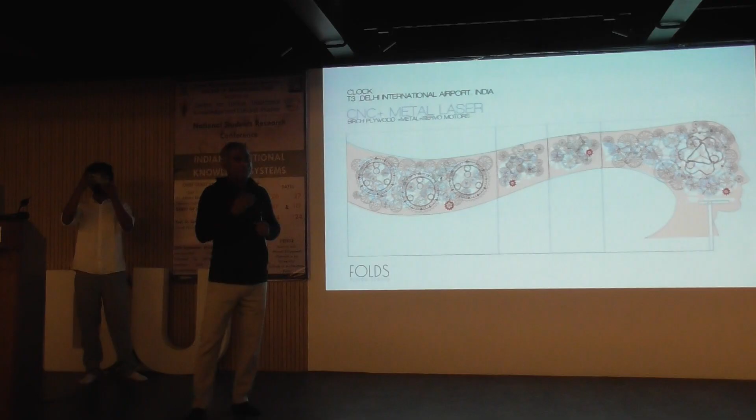So this is a project that we did long back in 2017. This project came to us as a small installation that we were supposed to do. We were in practice for almost 10 years by that time. So this came to us as an installation. We were supposed to design an installation which had gears, for Make in India.

This came with a certain cost, and that cost was 4 lakh rupees. We had to do the installation in 4 lakh rupees. That's the thing that came to us at the initial stage.

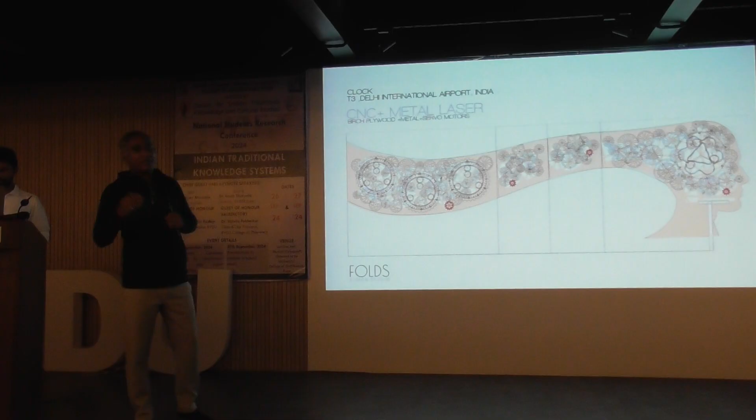And for the first time, a project came to us where we were trying to do an installation in an airport. This was the T3 International Lounge that we were doing at Delhi. So this came to us.

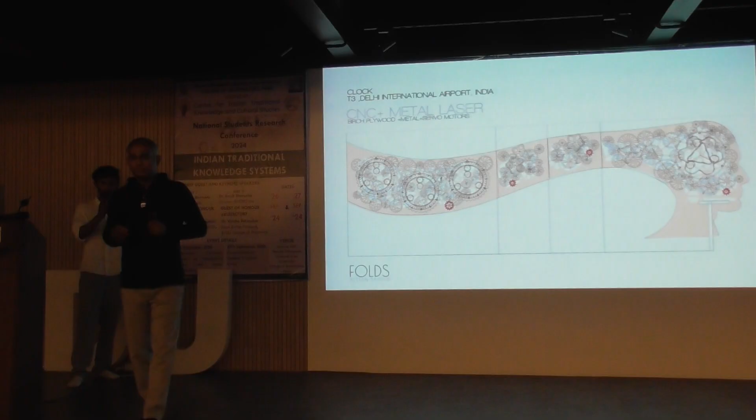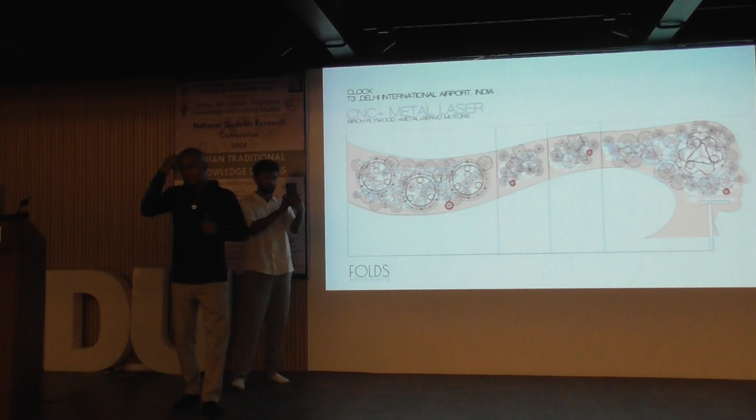Now the challenge is, since it's an airport, we thought we have to go beyond now, because for the first time we have to put everything into it. We couldn't leave this place as it was. So, 4 lakh rupees just for gears. But we thought, just gears - everyone does that. As an architect, what can I give other than gears? So we thought, let's design something which is out of the world, something an architect will never do. So we thought we'll design a clock.

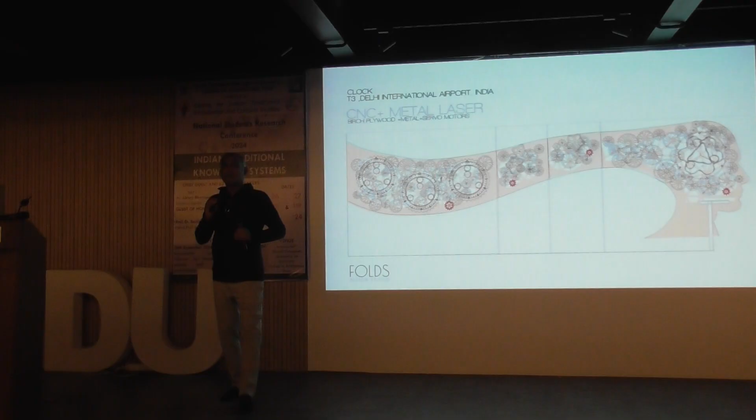And mind you, when I'm saying clock, it has to give time, right? It has to show time. Very important. And the best joke is, this is not a 2 feet, 3 feet thing, but it's a 40 feet long wall that we got, and it's a 40 feet long clock that we thought we would design.

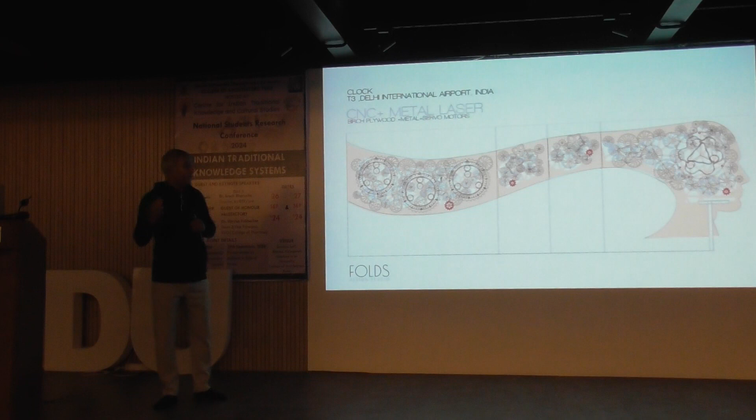Now that's a very complicated thing, with gears revolving into one another, and at the end of the day they're supposed to show time.

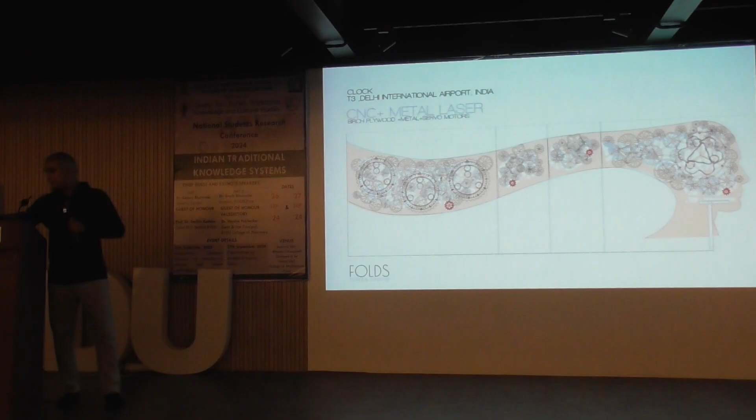So basically we thought we'll design a concept of a human being, a human brain, because the human brain always thinks something or the other, and everything is with respect to time. Whatever he is thinking, it is with respect to that time, is what we thought, and we designed a human head, and from there the gears continue, and then it ends up into the time. That's what we thought about.

But as we worked on it, we realized at the mid stage that this clock we were designing, the 40 feet long panel that we had, was not straight.

It's got an angle between. In the center we have got a big angle which is turning its surface at 45 degrees and going back again, and then the surface. Now that's the trickiest thing. So having gears in straight was easy. The clock was easy as long as our research was perfect, when it was a flat wall. The moment it changed its gear, its direction, that became difficult because we had to interconnect them at a degree. That was the difficult part. Yet we did it.

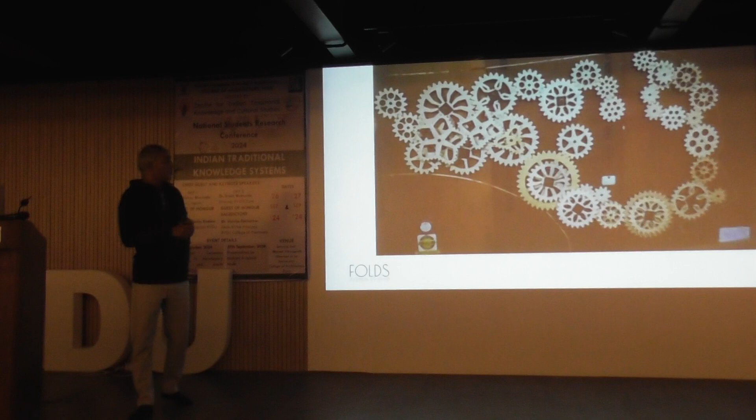So this was the experimental thing at the initial stage. On the right, it's working with servo motors. On the left, we were just trying to understand whether they were working properly or not. So this was the experiment that we did at our factory.

So that's the installation that went on the site. This was taken in 2017, that video. It's in an international airport. So that's how all the gears are interconnected. There are only 3 servo motors that we calculated to a precision.

In a 24 hour span, the clock leads, it gives an error of 2 minutes. So every 24th hour, we have trained a person, he has to go back and reset it. He resets it and the clock is ticking again.

Fortunately, 6 months back, I had a friend who was going abroad, and he had a flight from Delhi airport, T3, an international lounge. It usually has sound, it's an international lounge. He went there, he clicked this video for me, and then he said, 'Sir, the clock is running, it's ticking.'

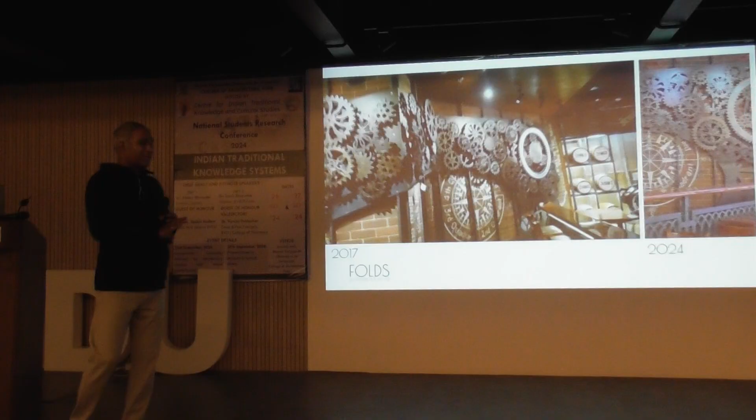So it's almost 8 years now. A clock like this, that huge, having almost 200 gears, designed by an architect, it's still working and showing time. So we were so happy that we built such a product which is still running today.

Many a times they don't work, right? Some errors will be there, some problem will be there, won't they? 8 years our machine has run, not even one single call till date. Okay, 8 years, not even one single call. Fortunate enough that our clock got built, and it is there, still existing.

So today when we hear that buildings are finishing in 40 years, my clock has run for just 8 years. Just thinking, good, at least something has been built. So anyways, then the clock as an installation, as an architect, I could do it.

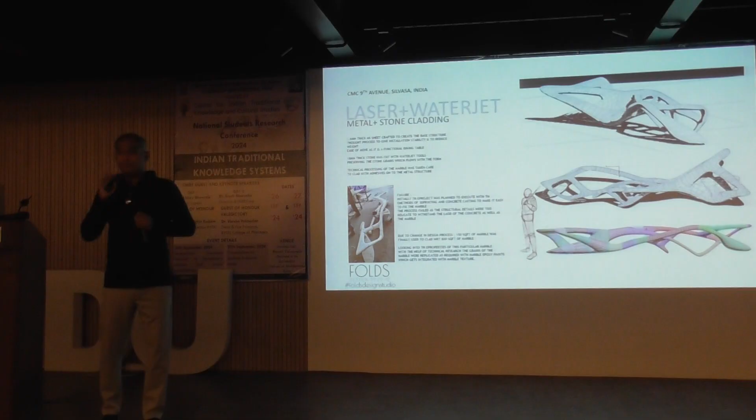Then this is like a bench, a dining table that we did for a classic marble company. This was the first time that we got our 3D printers in place. With 3D printers live, we were experimenting as architects, but we miserably failed. As architects, we are also designing, we are also producing. We miserably failed understanding the technology of 3D printing. But today we are masters at that. At that given period of time, we failed, but good we failed, because I think that was the wrong thing to use in this case.

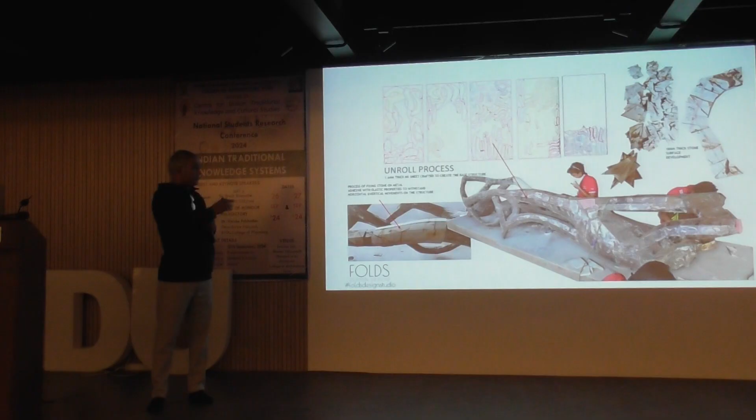Then what we did is we built structurally, we built a metal detail inside, because doing it in solid stone was the most dangerous thing, because if you have to ship it from one place to the other or move it even in your own area, a solid marble engraved piece may break, even a minor accident may break it. So we thought we will use a metal structure inside on a tessellated format. We designed this using programming languages, and then we got this metal structure intact.

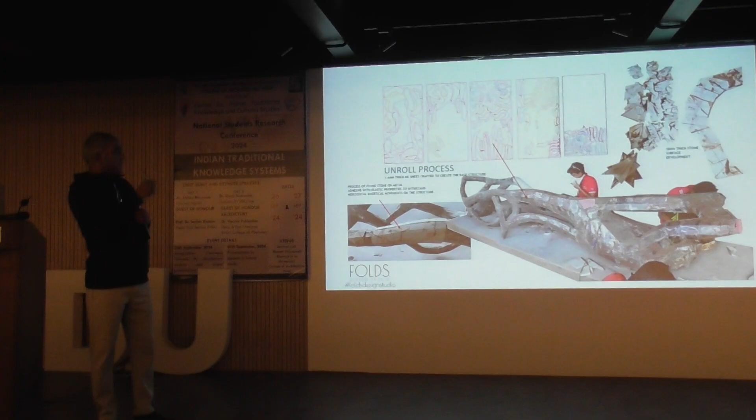Then we used only 4.5 sheets of marble for this 16 feet long table. Each and every piece was cut using a water jet machine, so that all the grains match with each other to get that kind of design detail. End of the day, you can see that all the grains are matching. That is very important, it's not that you are just making a product and delivering it to your client. Your details have to be matched, every piece, every grain has to match to each other. So that's what we could do end of the day.

You can see the flooring and the table that has been designed. They look as if it is jetting out from the floor. The same marble was used to execute this product. So we need to understand how to deal with materials. In this case, there were two different materials such as metal and stone.

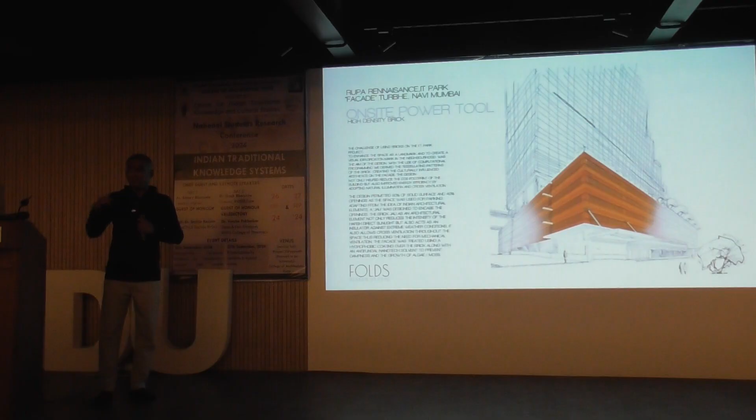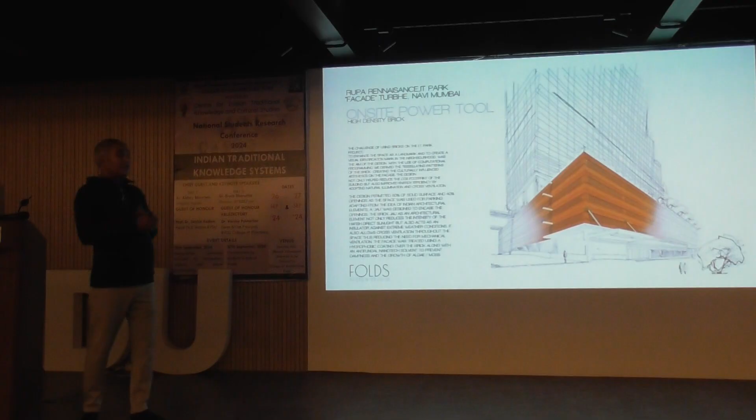When I'm saying steel structure, there's a lot of vibration that will go into the building. And then it is a parking bay - all the time there is movement inside the space. And since it is cars and vehicles that we're looking at, the temperature inside the building will also increase. So we thought, let's come out with some sustainable material, such as brick, which will also reduce the temperature.

So hence we selected this material as the base material. We got these high density blocks from Mysore, and then we cut those blocks. Usually brick comes with a certain kind of size, but we cut each block into 5 multiple pieces so that we can reduce the cost.

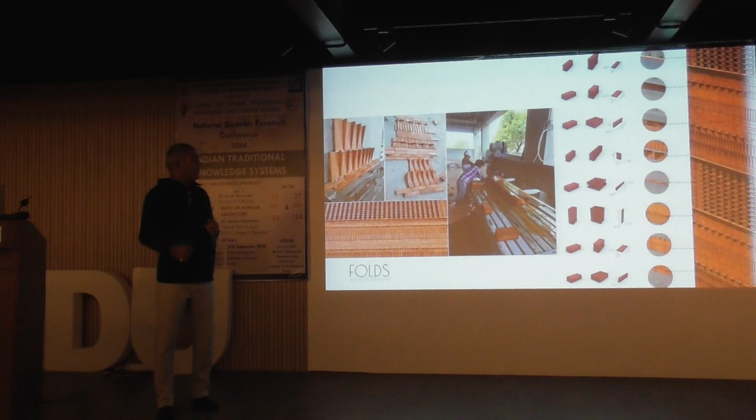Then how do we cut it? For 1 lakh square feet, that means 1 lakh bricks, cutting 5 pieces each, what will the time schedule be? We had to build a machine on site like this. I built a machine where I could cut 20 bricks in one line, so within 1.5 to 2 minutes I could cut 20 pieces. That's how we built a machine to get that kind of outcome for the bricks.

Bricks are being made now, but with the bricks, what is the design that we can do? So we created multiple patterns on site. This has nothing to do with computational programming, it's just on site laying and playing around with bricks. That's what we did, and finally we came to a solution.

We decided we would have this kind of facade, this kind of design detail that I'm trying to show you. We thought we'd have this kind of facade on the surface of the building, so there are different types based on how the brick was cladded onto the facade.

We were given a concrete surface, a lightweight concrete facade for the building. We thought we would paste these bricks onto this facade. But how do we paste it? What is the material, what is the adhesive that is available?

Part 1, part 2 - bricks are very attractive to algae, right? Within a few days algae will form, that's a problem. That's the reason why most people don't use it. So what do we do about this? We had to find new resources.

We got something called a nano coating. What we had to do is, before pasting these blocks onto the facade, we had to dip each and every brick into this nano coating material, sealing all 6 sides of the brick before pasting onto the wall. This way, during monsoon, the rain doesn't percolate into the brick, water doesn't retain there, and no algae grows on it. So this is the protection we had to do.

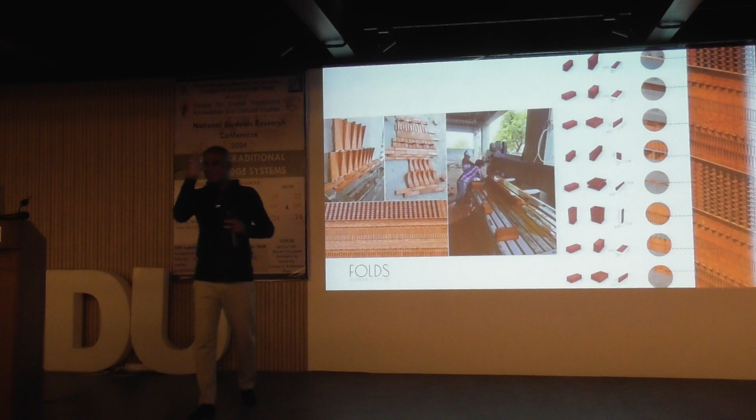Part 2, you're also seeing brick where these vertical pieces get cladded onto the surface like this - vertical, not like the other pattern. The surface area of the brick in this case is more, but in this case it's just 12mm thin. So getting this 12mm thin piece pasted onto the wall of a steel building which has vibrations - what adhesive do you need to use for that?

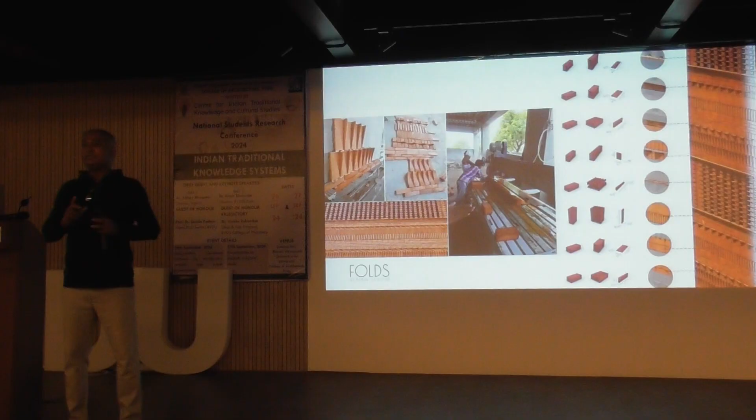That is again important, so we had to practice all this at the initial stage to derive a good solution and get the building executed. We had all those design details, multiple challenges, before we could execute that building. That was the surface that was given to us.

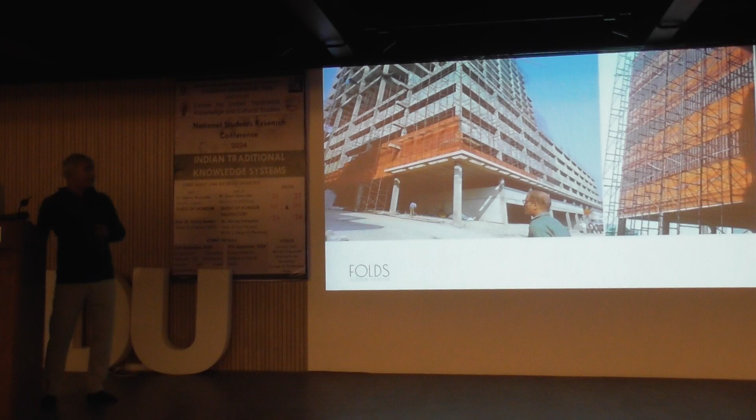We had 17 different people. We taught them how to do it on the floor first so that we get precision - 5 floors worth of height, having these bricks laid together in one line. They are laid in an absolutely straight line, and to achieve that is not easy at all. It's got multiple layers.

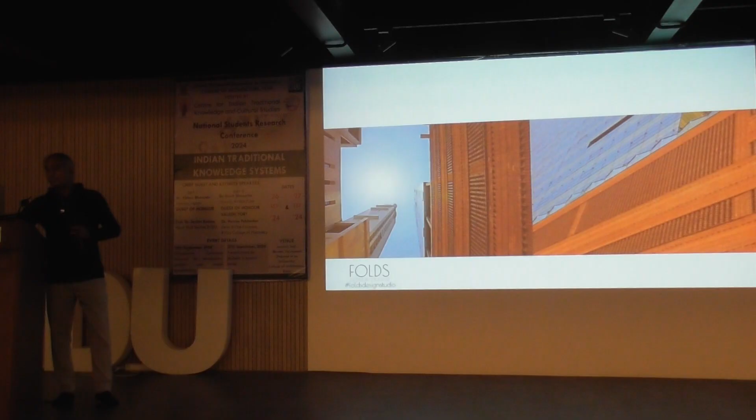There is also ventilation in between. That's how the building looks. You can see the precision. The building was done 4 years back and it still looks like that - there is no growth of algae on it at all.

The best part is this nano coating material protects your brick for a minimum of 5 years and maximum of 10 years. Before 10 years, you just go back once, spray it again, and nothing will happen within those 10 years. So that's how these materials work.

Look at the detail, look at the shadows falling on us. Luckily, this building's surface came to us exactly placed in an east-west direction, so the play of light was very beautiful in this case. Those details were precise.

Internally the jalis were designed so that we could get cross ventilation and reduce the temperature inside. We built these jalis, but they may look very simple. Do you know these jalis are vertical, half-cut bricks, laid on just a 12 mm slice of a brick? That's the stability of the product, and this is something we need to understand.

It's not easy. Small bricks laid one above the other as a continuous slab, again one above the other. Now the bonding agent has to be perfect. You can see the bonding agent there. It has to be just 4 to 5 mm or 6 mm maximum. Even if you increase from 6 to 7 mm, the bonding agent will not bind these two materials. That's how important it is.

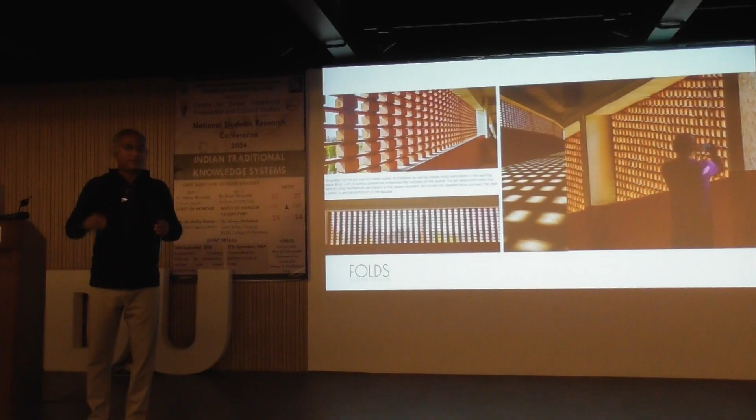Then we had to call the vendor, and the vendor was ready to give it in writing: 10 years, nothing is going to happen. Before 10 years we will come back, check it, do the grouting and leave. Next 10 years you don't have to do anything. So that's the kind of adhesive they provided to us.

Now this had fallen. Then we realized the worker had used the bonding agent material up to 16 mm, because of which it did not bind to the base material. So those are the errors. We realized this won't work. 6 mm means 6 mm only. You can't just increase it because we have material lying around, let's stick it on.

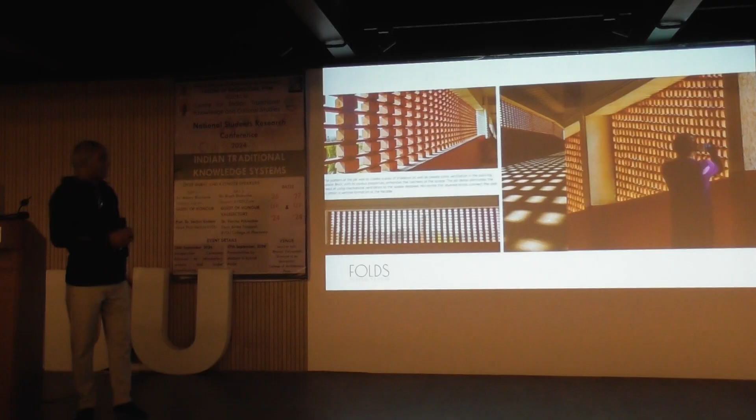So that was all about the facade. Then the interiors we did inside was almost a 20,000 square feet lobby that we got. We didn't want to design it the way lobbies are typically designed, using Italian marble, ceilings and wall coverings, everything. We wanted to go in a different way.

While coming back from Goa, we saw this kind of tree lying down on one side of the road. We realized, why can't we have that kind of design detail? Let's copy that as an art installation inside the structure we were designing. Quickly when I came back, I drew that sketch, a 120-meter long sculpture, weighing almost 80 tons, supposed to be suspended from the ceiling. That was the design we thought we'd go for.

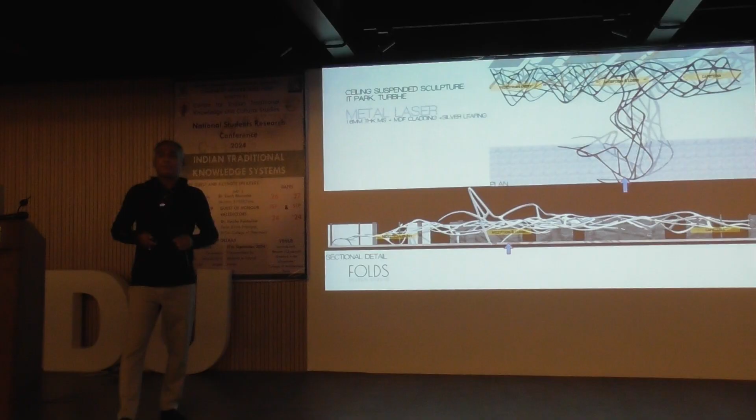After the sketch was complete, we made a 3D rendered model using software. But after making the model in software, we can't end there since we have to execute. We had to actually 3D print the model and understand how it would look when placed inside the building, with human scale, just to understand whether it would overpower the space. So finally we did that.

80 tons of load was supposed to be suspended from the ceiling, a 120-meter long sculpture. If we have to suspend an 80 ton load from the ceiling, what do we need? There might be huge cables, metal structures, a lot of things, but here there's nothing like that.

We plotted 200 separate points on the whole installation, which is 120 meters long. Each point can take a load of 600 kgs. Each point, using a 6 mm thin cable, is what we have used. This 6 mm thin cable has been used to suspend the whole ceiling at 200 different points so that we can distribute that load across 200 different areas. And the whole thing got suspended from the top.

We could do this because we had to find a vendor who could help us with this material, these SS cables, which are only 6 mm in diameter, so that the whole sculpture looks seamless.

It looks as if it is floating in air. That was the whole idea. But we can't do that, right? It's not magic, we have to suspend it. This is the cable that we could get it from there - the Hilti cable that we used. The whole product was unrolled.

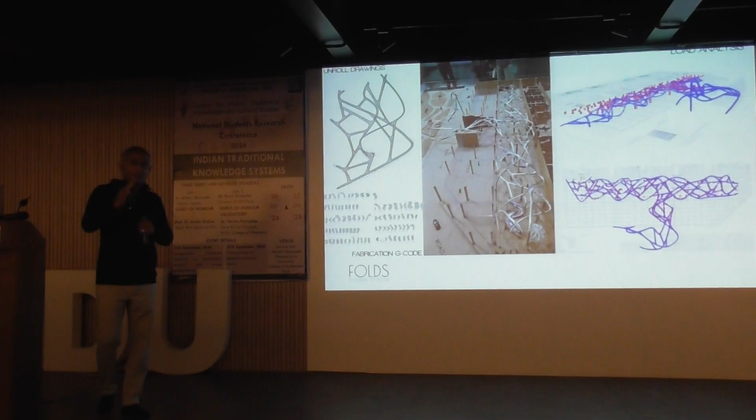Unrolling is something which we may have learnt in first year students. I don't know whether you've learned that unrolling of surfaces, of the objects that you tend to do. Unrolling is something which you need to learn in a much better way, which is being done in first year, make sure that, because even today we are doing this work. Basic design and graphics is what we are working with.

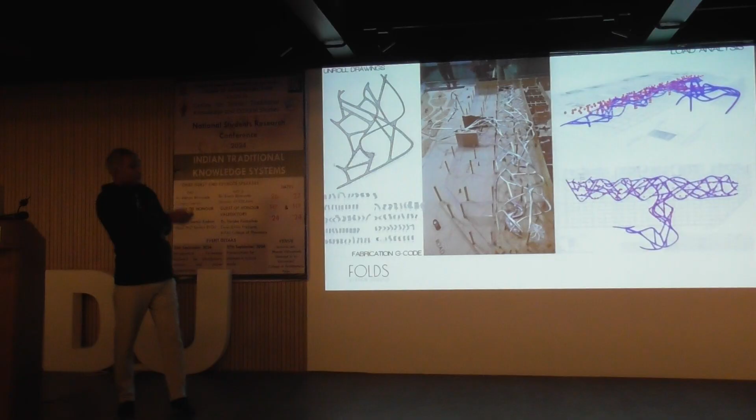So here unrolling was done. We understood the calculations, the whole project went on. We had to do metal fabrication, use metal laser machines to cut this so that my cost could be reduced, and we could get that whole installation done like this.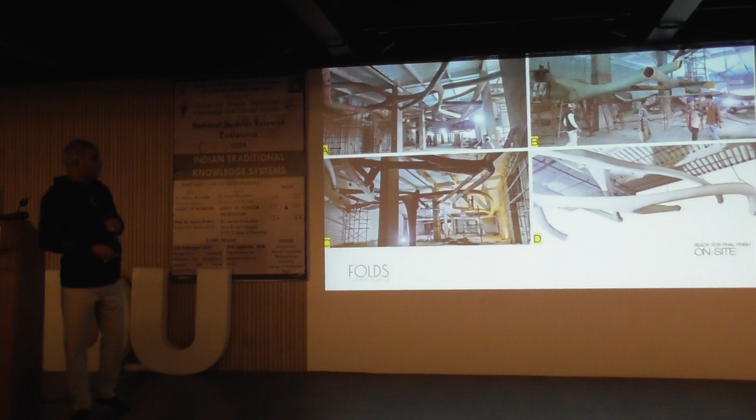So you can see the cables on top - many cables are visible. You can see, but it looks seamless. It's a 120-meter long art installation. We didn't want anything on the ceiling. We wanted only this art installation to respond to the people who are going to move below this and understand that they are in a different space by itself. So hence, we had this kind of a design detail.

This thing we did during COVID. We wanted that whole sculpture to have a mirror polish on top of it, we wanted that to be chrome. The whole idea of this installation was - it's a chrome installation on top, which is actually trying to take the impressions of the people moving below and their information. That was the concept.

But unfortunately, we had to deliver the project, so we had to use just silver leafing and get the job done. Because chroming it, again, it was a 6 month job on this product, which we didn't have time for, so we had to do this.

So then, in that space, we also designed - since I'm an architect, during college I was best at making models. Now this is a space where I got to build a huge model, because it's a 120-meter long wall that I got. So what I did is, I stay in Navi Mumbai, and the project was in Navi Mumbai.

So we built a whole Navi Mumbai map, a 40 kilometer Navi Mumbai map on a 120 meter long canvas that we had. We built the model having each and everything in place - the road network was there, the buildings were there, railway stations were there, everything was in place. And the developer whom we were working this project with, his projects were highlighted because he was doing multiple projects in that space. So we just highlighted his projects and the whole wall has this canvas.

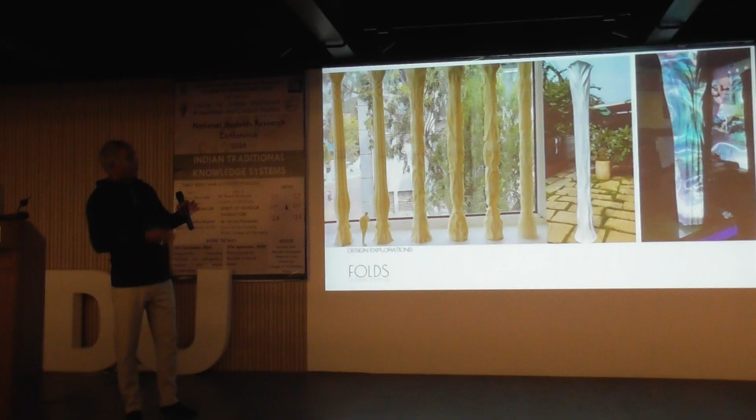So then I had to print an 8-foot column and show him that the column will look like this, and if we do projections on top of it, it will look like this. Yet he did not get convinced.

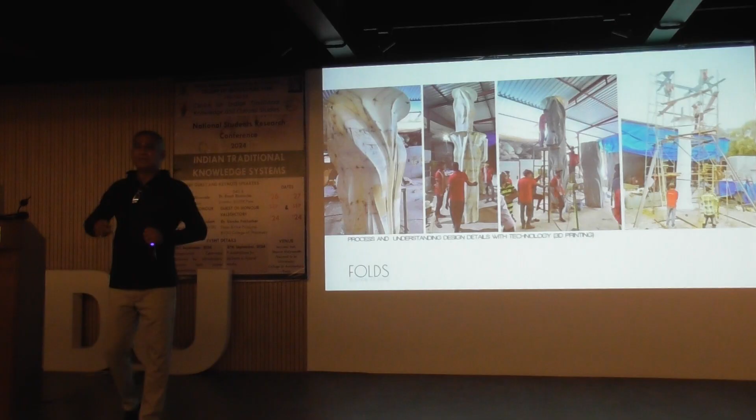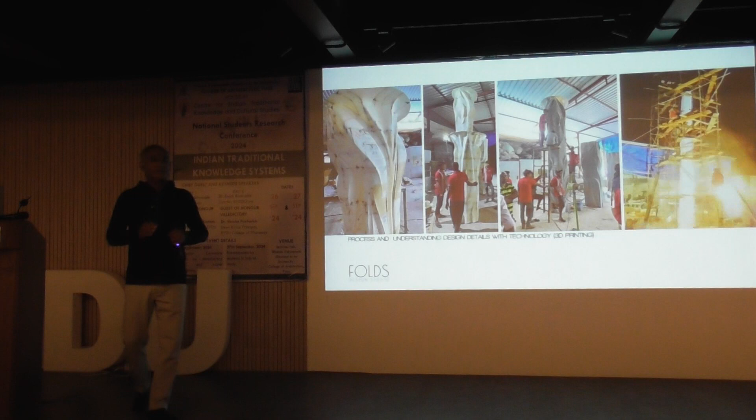When he did not get convinced, I said, let's 3D print a 40 feet column and show it to him how it is going to look like. So I had to literally build that 40 feet column for my client to convince him that your column is going to look like this. And finally, after building this, we got the approvals and we convinced him and got this finally made.

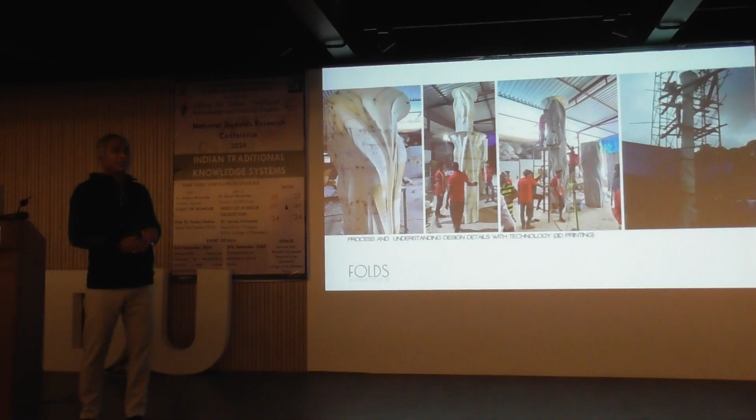So the whole logic is, at times, doing these kind of things is easier if you have the knowledge of machines, how to use them, what material to use, and whether they can be built or not. So we could design all those details and make sure we go into the process of execution.

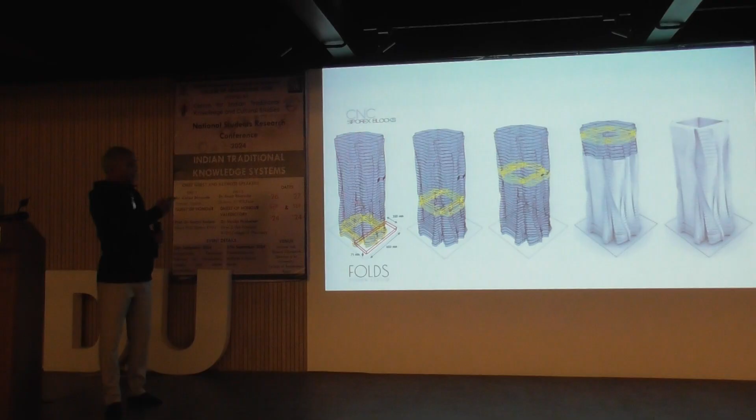So when it went to the process of execution, what is the material that I am supposed to use? Because we had 22 columns like this, not just 6. 22 columns, same details, same design. How do we do that, reducing the cost? So we used lightweight concrete blocks, multiple pieces, more than 5.5 lakh pieces were cut and shipped from Mumbai to Bangalore. 30% of them broke, I had them remade, but the cost was nominal.

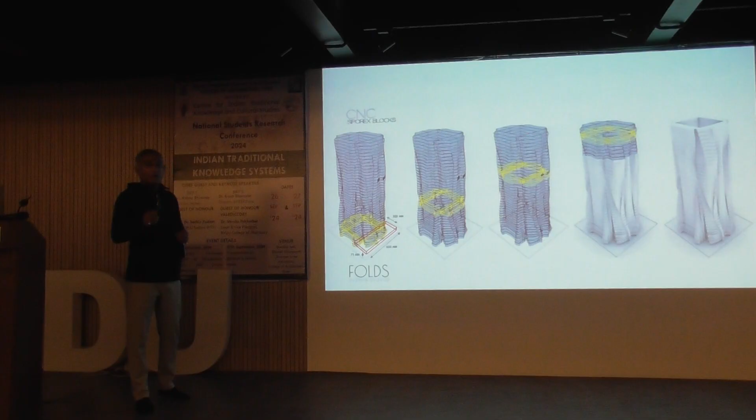So we cut them. There is an RCC column in the center. This was stacked all around, one above the other. In the center you see that's a 3D printed column. On the right, its finishing is going on.

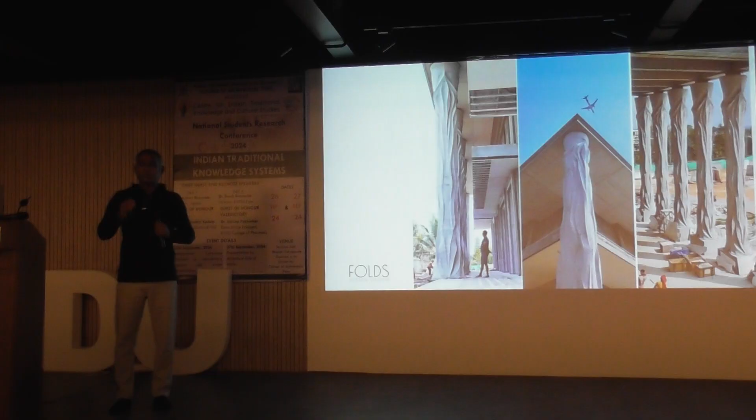So the columns look like that today. You can see the detail that was initially envisioned. It got executed by convincing the client to that extent that he understands what we are planning to give him. So at times they are difficult, but you can still build them. So that's the detail that you are trying to see.

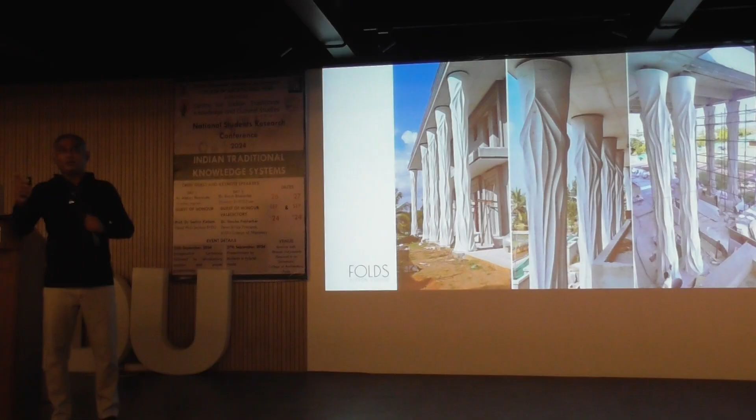Those same columns, the same design detail. At the initial stage, I said the information that goes from an architect to your labor, there shouldn't be loss of information. The information has to be passed on perfectly. This can only happen if there is a mediator in between, and that is your machines. If the architect, the machines and the labor work together, you can get your end product.

So that's how they look like. The work is still going on. You can see the first image that I showed you as a slide, and this slide, the columns are intact, the distances are intact, the size is intact. So everything has been perfectly placed and made. This is something you can achieve as a designer if you know the language of machines, if you know the technology in a much better way, which is necessary today.

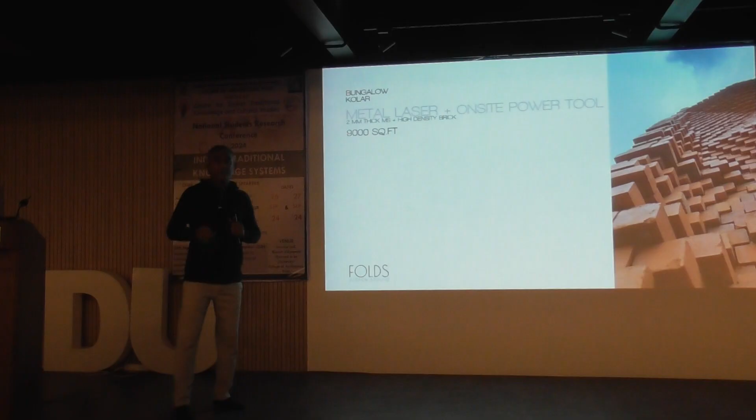Then we are also doing one project, a bungalow in Kolar, which is again in Karnataka. This is a 9,000 square feet bungalow that we are doing. This is the bungalow where I was talking about the 20 mm thin slab. In this case, the RCC consultant is also us, because we didn't have an RCC consultant who could help us out in terms of building this project.

We said we will do it, we will go back. We made the project, we went back to do the calculations, and he had to do the calculations and get it corrected. And then his certification was done, because we need to submit a certificate from an RCC consultant, which is a must, right? But at the initial stage, I couldn't convince him because he wasn't ready, he said in his life he hadn't made such a thing, that a 20 mm thin slab is not possible. But we did it.

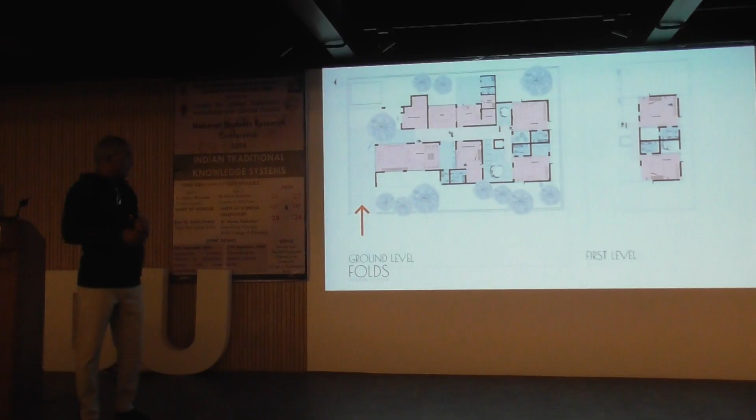So that's a 5 BHK plan. It's spread in almost 12,000 square feet of space. We have got 9,000 square feet as a built-up area with landscapes all around, with courtyards inside. We had this kind of a parabolic curved roof. End of the day, while working, we changed the whole roof to that extent that you have got too many bends. So it's not just one single parabolic roof, but the whole roof is parabolic.

We used completely brick in this building, though we also have RCC columns. Initially we had to make this model just to understand whether the structure is feasible or not. We did this as a membrane.

Then the bricks and everything, all the details were sent to the site. We are almost 1,000 kilometers away from Mumbai, trying to teach our people where to place the brick. We numbered the bricks and told them these numbered bricks are supposed to be placed at this distance, so you get this tessellated design formation, with no loss of information.

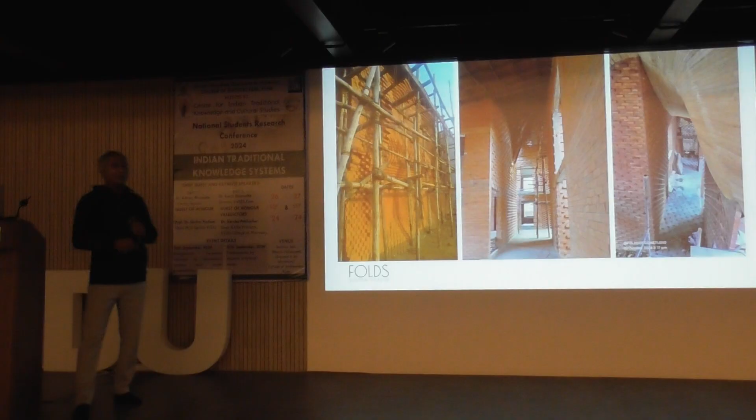That's how the details look, completely parametric design detail, which we could execute as conceived. Internally also everything is brick. Where the columns are, we slice the brick into smaller pieces and clad on top, so it looks like one piece brick detail. At the bottom of the roof we used wood to curtail the heat.

On top we also have a 12mm lightweight concrete block fixed on metal, so overall it's a 20mm thin sheet slab. The work is still going on. These are bungalows, new things we are trying to develop and build.

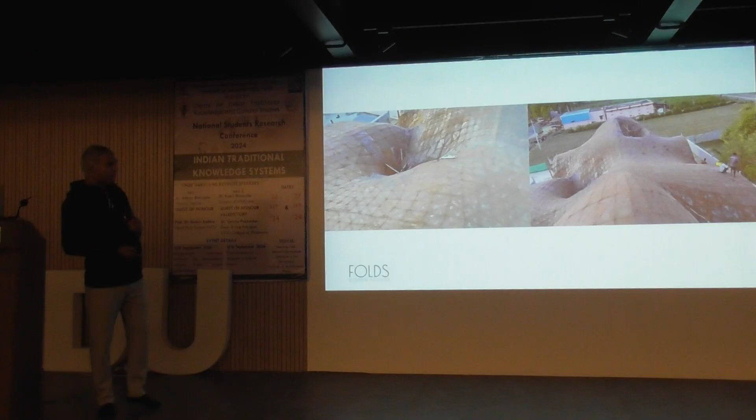That's metal, you can see people standing on it. It's just a 2mm sheet metal cut in a tessellated, meaning triangulated, format, done using 3D software. We cut them, number them, take them to site, and join everything together the way we want, to get that kind of roof. That's the detail we could achieve.

You can see how thin the slab is. As a designer today, as an architect, we can dream things and also build them. So you don't have to worry when your professors say these can't be built - you can tell them these are possible and we can still do it. Answers are there.

So that's how the thing got delivered. On the left is the roof, which we've cladded with lightweight concrete block to curtail the heat entering, by having this at the top along with wood. Internally the temperature reduces more than 6 to 8 degrees inside the house. So this is a bungalow.

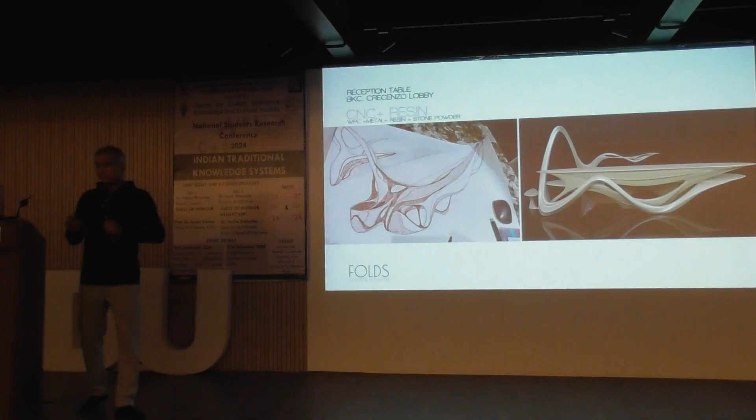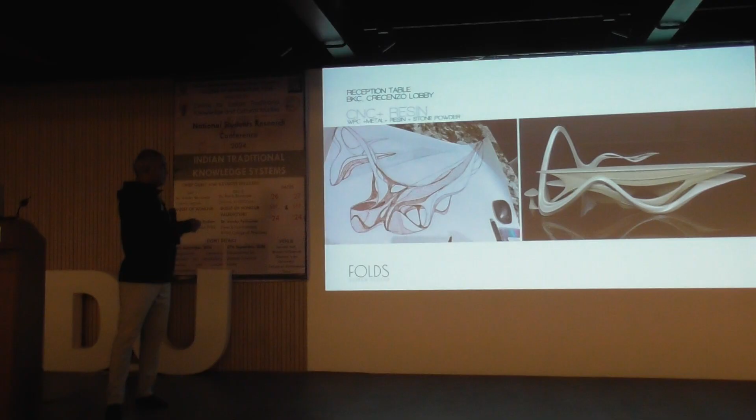Then again going back to tables - this is another information table we designed, which we'll quickly run through. This we did in Bandra, Mumbai, for a lobby. From a sketch to a design, it's a 25 feet long information desk.

Not one piece, but two pieces, mirror images - a huge lobby with mirror images. Getting mirror images in place is not easy. So we did 3 installations in this case, same area but using 3 different materials.

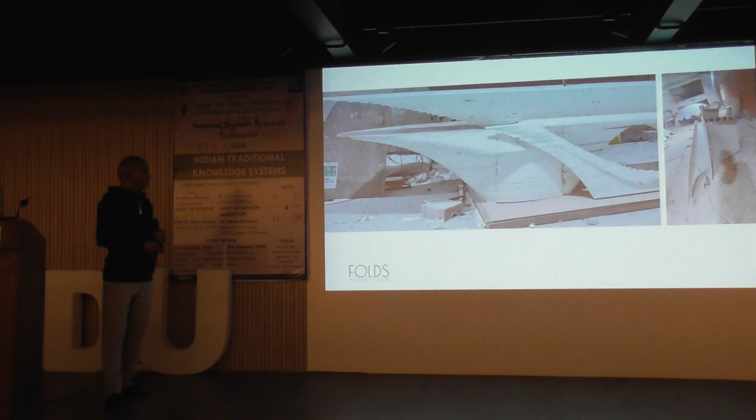We divided the whole product into multiple pieces, getting inspired by the Avatar movie, Waterworld. Using WPC as a base material and then spraying that with stone powder, we created holes through which we pass structural members - steel rods inserted so the structure is stable.

So that's how the whole thing got converted - spraying of composite marble was done to achieve the end product. Those are 2 mirror pieces - you can see how similar they are. No loss of information - this is something we need to understand.

It's not an edited image, it's an actual image. That's how it looks. So from design to execution, you can see these are possible today.

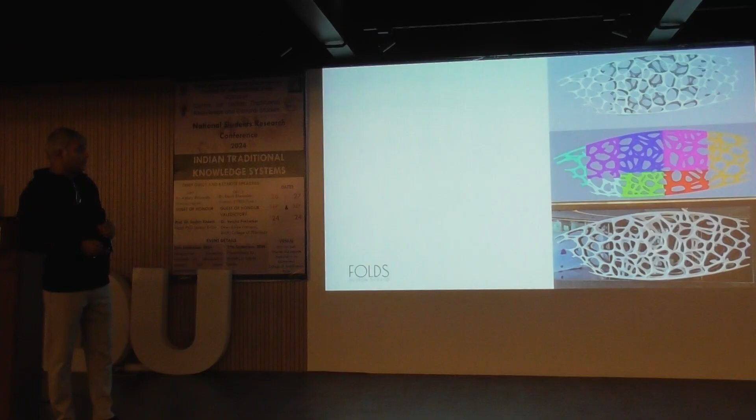Then we did a small art installation inside the same space. It's an art installation, but we wanted strength to be there, because even though these are art installations, they were easily accessible to people - they could look at it, touch it, hang on it. We didn't want any accidents to happen. We could have done this using 3D printing also, but made sure stability was there.

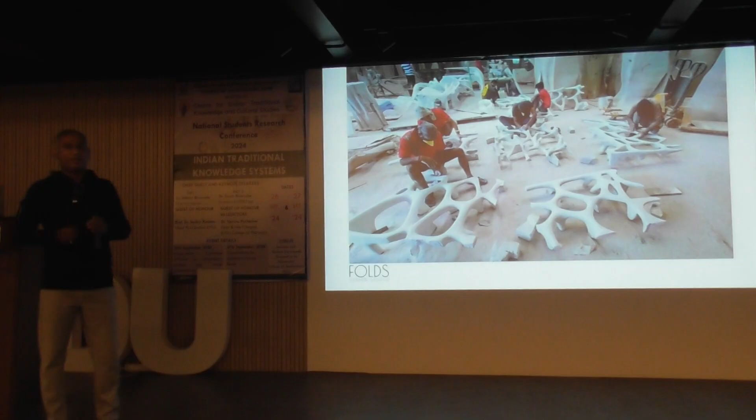So we used MDF as a base material, then sprayed again with composite marble. Composite marble is something we are using more and more nowadays because it protects and seals the product completely so moisture doesn't go in - being resin based, it seals completely and is moisture protecting. That's how the whole installation went on. There is a mirror at the back on which we cladded this, so it appears as if it is a double image.

Then we did a separator - a screen, a baggage screening partition, where we have baggage and an entrance lobby in the same space. All these three installations were done in the same space but using three different materials, and all were mimicked from nature. We mimicked this from the water areas because there are backwaters in Bandra, so a lot of mangroves. We thought we'd use corals and mangrove root details to build these kind of designs, so everything you're seeing is mimicked from the water world.

We divided this into multiple pieces. Almost each piece was again divided into four parts. They were engraved using lightweight concrete blocks in this fashion, then pasted - you can see the numbers. There were almost 4,000 to 4,500 pieces joined together, joined with adhesives. These adhesives are not regular ones, they're cement-based block adhesives, and by using that we stacked them one above the other to get that design outcome.

We also incorporated light into it so that we could get this kind of end outcome. It's a screen designed to achieve that precise detail we were looking at in the initial stage, so all the details are intact. Light got incorporated at the end - initially we never thought we should incorporate light, but at the end of the day that was a last minute thought. The design had the flexibility to insert light into it, so that's how it looks.

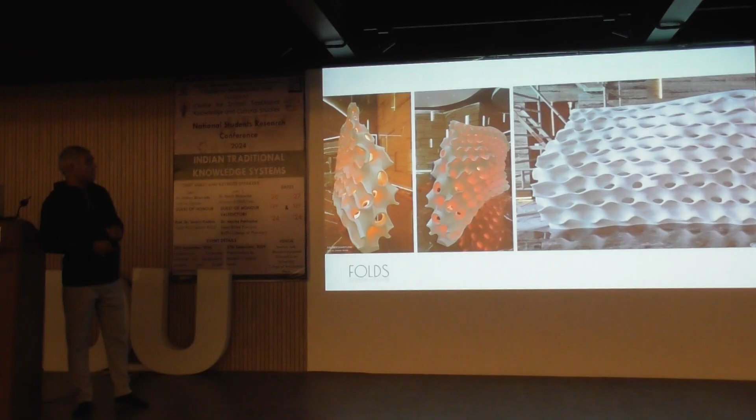So doing these kinds of designs is fun. Then comes a table, which is one of the trickiest - after doing so many projects, this was the toughest project we ever did in our life till now. So why? I'll explain.

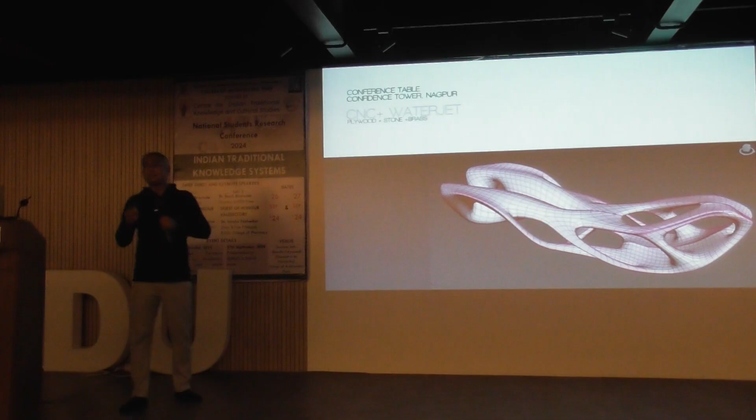This table has a similar kind of design detail using stone and metal. If you see the texture, those lines you're trying to see, we wanted those lines to be there on the product also. Earlier you had seen it's all marble, but in this case we have marble and wanted those lines done using metal, that's brass. So bending brass, inserting brass, and putting that on top was the most difficult part.

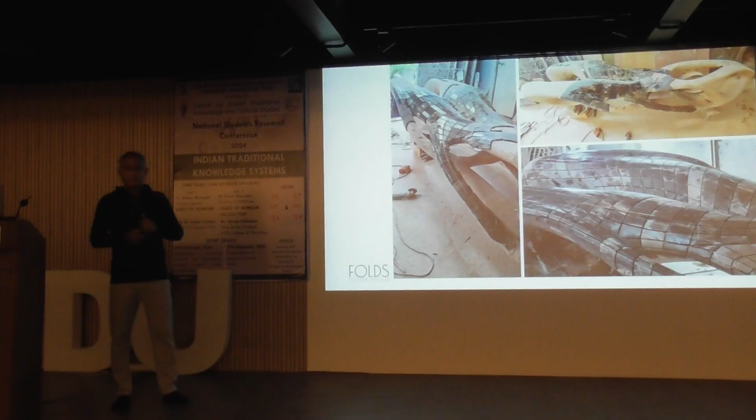We used ply at the initial internal stage rather than metal, and got that thing done. Then we cut metal, cut stone again using computational programming. We got the design detail intact, but sticking the metal was the biggest pain we ever had to pass through, which took a toll on us for almost six months. We delayed this project just to make this table - huge losses, but yet we could complete it as per the design process we had done.

At the end of the day, all this metal was stuck to such an extent that you get that as a design detail. You're not losing a single piece of information that was initially designed, all the way to the end product. So that's how the end product resulted.

So the whole team was happy, thinking chalo humne kuch to achieve kiya life mein. Everybody combined together and said chalo photography karte hain. It's fun doing things, it's fun learning with this kind of experience. A lot of hard work goes in, many sleepless nights, money is also lost. But if you've thought you want to do a project aur karna hai na, end of the day I want to deliver - if you have that in your mind, you can do it.

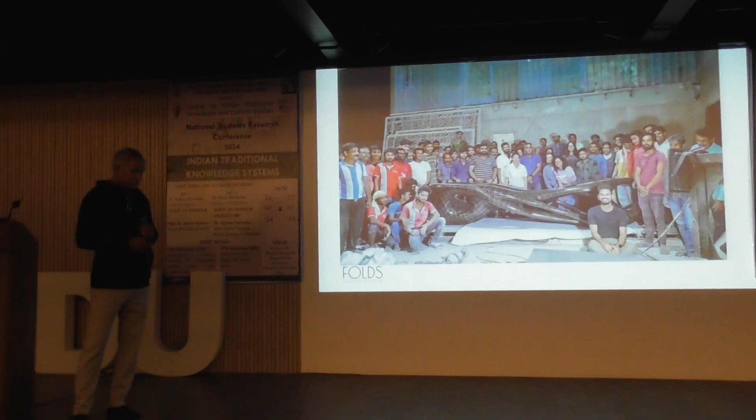So we did all these kinds of projects. Then recently we did this staircase, which was designed by Andrew Palfinger. He's an associate to Mad Architects New York. He was here in August last year.

We do Unfolds, which is a knowledge sharing platform where we invite different architects from different parts of the world. They come here, take lectures, teach students, teach architects - it's a six day program we usually do. Two days each with one of the architects, and then they teach AI, programming languages like Rhino and Grasshopper, Blender, Cinema 4D.

So we selected one of the designs that was done by Andrews, because he was coming here, we thought we'll build one object that he has designed. We could have taken from his Instagram page - all the designs he has done in life are unbuilt. He has not built any design.

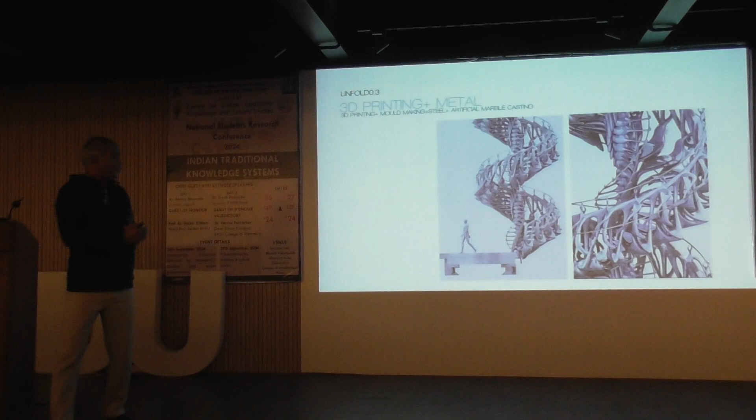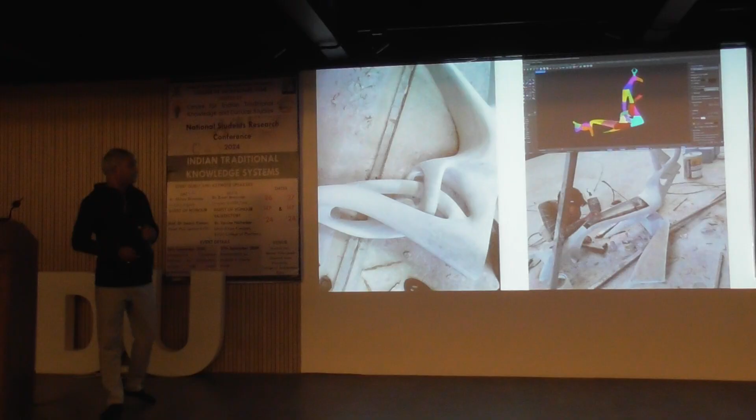He has only designed them, and they are there as photographs on his Instagram page. So we thought we would use one of the things he had designed, a structure, not a painting. Here in this case, it's a staircase that we selected. We thought we will design that using 3D print technology. You can see each step, in which we are inserting metal so that we can give stability to the object. That's how the 3D print model was done.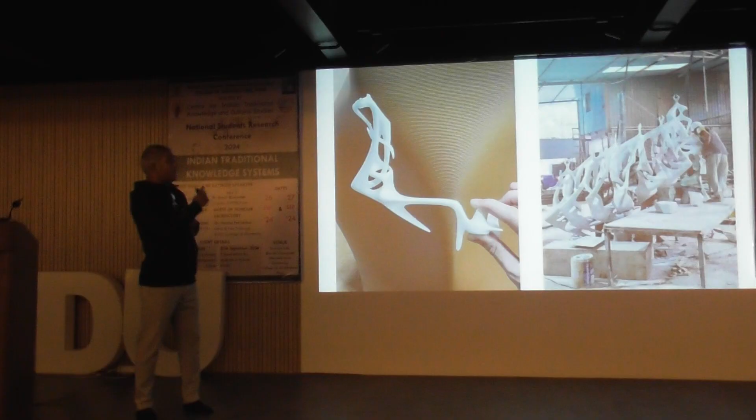Then a mold was created, and you can see multiple pieces joined together. Each piece is interjoined, and the beauty is it looks as if it is one continuous piece of staircase, but everything is cantilevered from that central spine - it's called an exospine. You can see that central spine, and everything rests on that small plate at the bottom. That's how the whole staircase got made. It's a cantilevered staircase. Each and every detail that he tried to design in his software has got executed.

All this, when I'm trying to show this kind of design, is all about information. There is no loss of information. All the time I have been telling that there is no loss of information. You need to understand this point very well. Whatever we design in college, we have to deliver that. That is something we need to understand. And similarly, when you go out, the same thing has to happen.

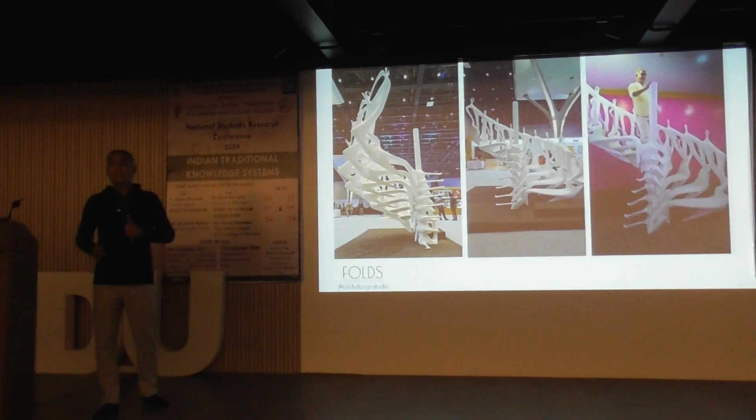So you can see that's how the whole staircase was detailed out on software. We designed it so that you can easily climb on it. It looks as if it's just a decorative piece, but it is not - it's a structural member. You can literally climb it, you can literally sit on it. We had almost 6 people sitting at one given period of time, each weighing more than 100 kgs.

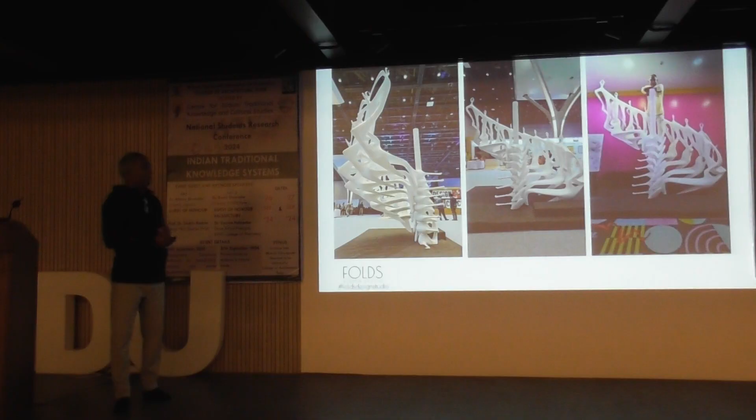This was exhibited in the exhibition. We had few people, so that day we were worried, but we had 6 people sitting together. On the left, that's Andrews - he was there in Mumbai in August. So that's how this thing got detailed out, and it's there.

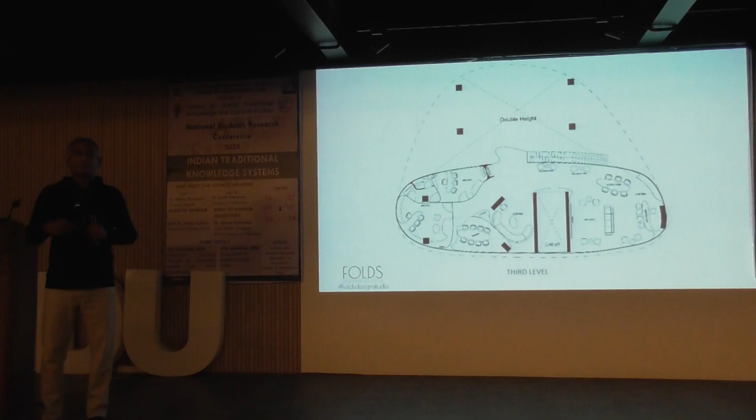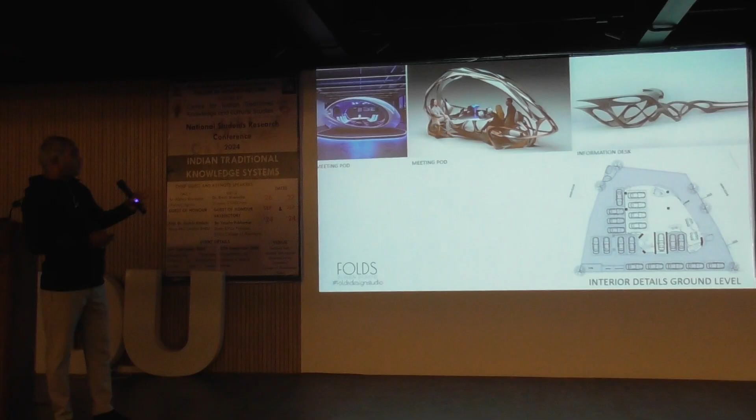This is a car showroom, again we are doing in Mumbai, completely with the same thought process. Since it was a car showroom we were trying to do, we thought we'll use the chassis as the basic module - you know chassis, right, chassis of a car. So we thought the whole building should look like a chassis. We had all the design elements, the pods inside, the table, everything should look like a chassis. Even the building should look like the form of a chassis. That's what we thought, and we designed this.

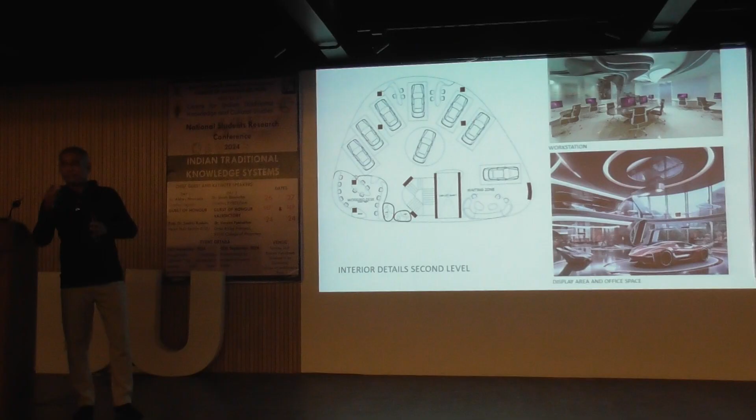The project is still going on. All these projects we are trying to show you are from the last 1.5 years we have been struggling to get our projects intact and placed. There's a lot of design detail - we try to send the information to people, get them executed. Not easy. Simple lines are very easy, but getting these things in place is not at all easy.

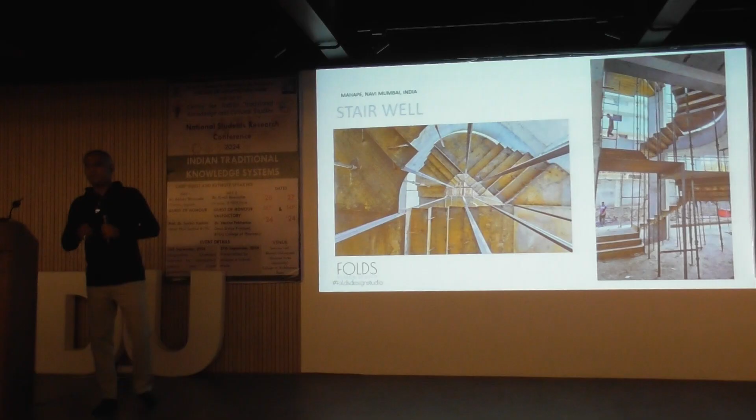That's the staircase done with only a 6 mm thin slab, a thin metal sheet that we tried to do. Not easy - people will say no at first, but it is possible. Nobody is ready to build these kinds of staircases, but we did it. So that's the design that was produced, and the exhibition got done. Then there's one more staircase at the upper level, which is completely fluidic in nature - again a 6 mm thin sheet was used to get that kind of design detail.

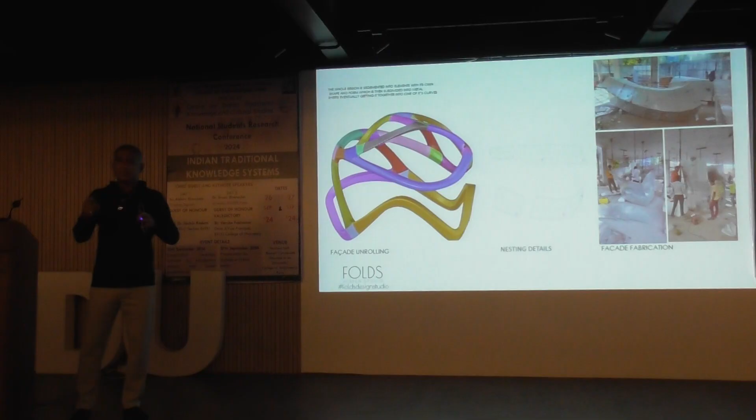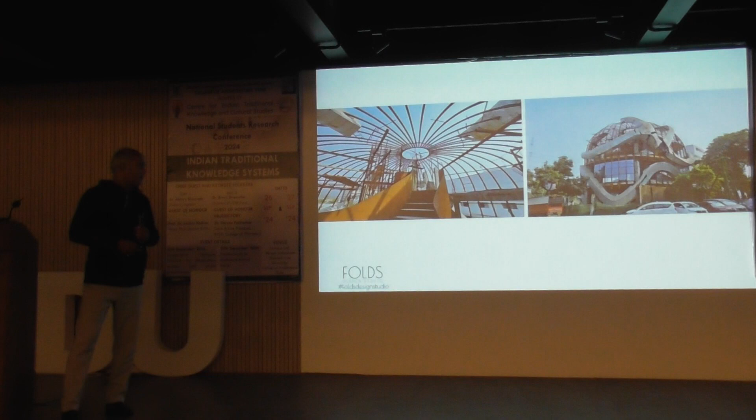This is again a chassis that we are trying to design, which encases the whole building above the glass. So this is how the design was done, and the making is going on - we are at that stage right now. We are stitching each and every piece. The whole work is in process. As we designed it, we are trying to deliver it out now. Part of the glass has been installed, part of the metal sheets has been installed. So this is again a...